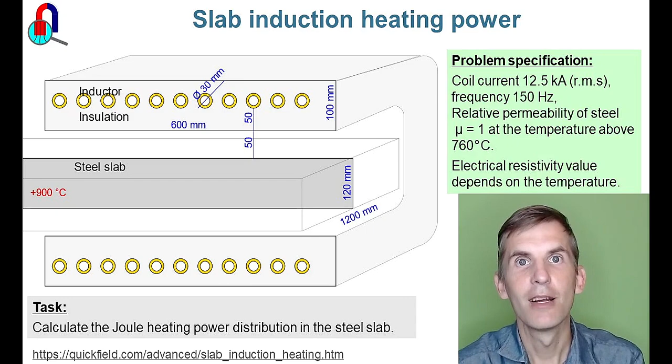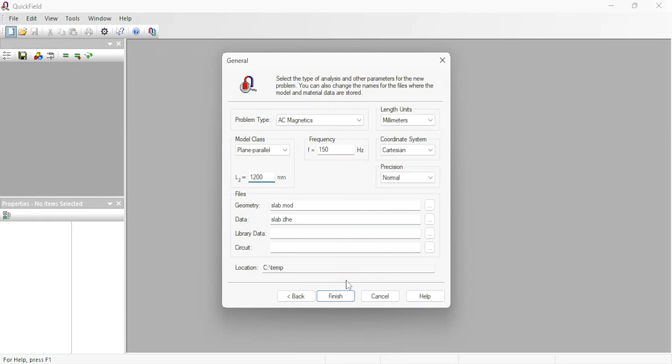In QuickField, I create new problem, slab. Next, problem type is AC magnetics, frequency is 150 Hz, model class is two-dimensional plane parallel, and the slab thickness, the axial length, is 1200 millimeters. Finish.

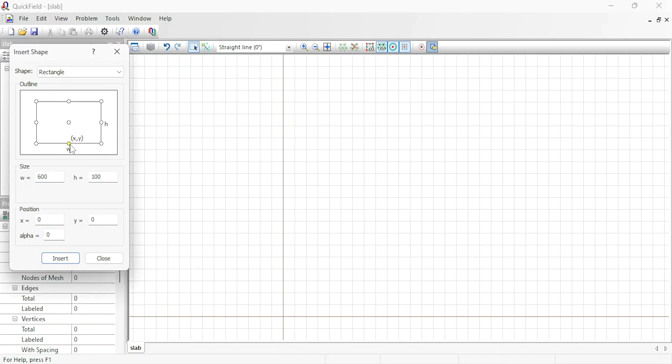On the left you can see the problem pane, and on the right is the geometry model editor window. You can draw the geometry model here, or you can import the geometry model from the AutoCAD file. The model is simple, so I'm going to draw it here from scratch. First, I'm going to insert a rectangle with the dimensions of 600 by 100 millimeters. The insert point will be this one, and it should be located 50 millimeters above the horizontal axis. Insert. This would be the inductor.

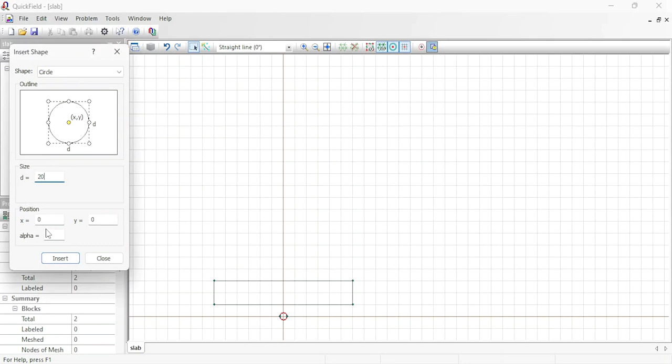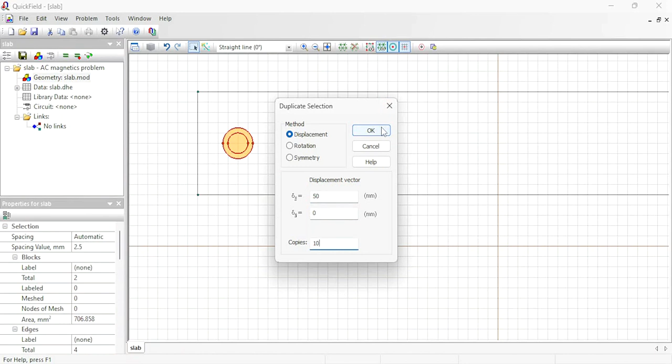Now I need to insert a conductor, a circle with a diameter of 30 millimeters. Insert, and another circle with a diameter of 20 millimeters. Insert. Now let's zoom in and put the circle in proper position here. Then I need 10 copies more. Right click, duplicate selection, displacement by 50 millimeters, and I need 10 copies more. Okay, now let's move it to the right by 10 millimeters.

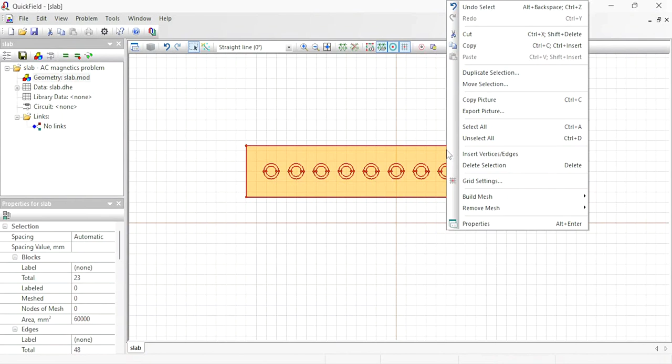This is the upper part of the inductor, and I'm going to duplicate this to get the bottom part. Right click, duplicate selection by the symmetry along the horizontal axis. Okay, this is the bottom part, and I need to insert the slab in the model. So I'm going to insert another rectangle; in fact the slab is much longer than the inductor. I will insert the rectangle with the width of 2000 millimeters and the height of 120 millimeters. So I will have the slab extending to the left and to the right.

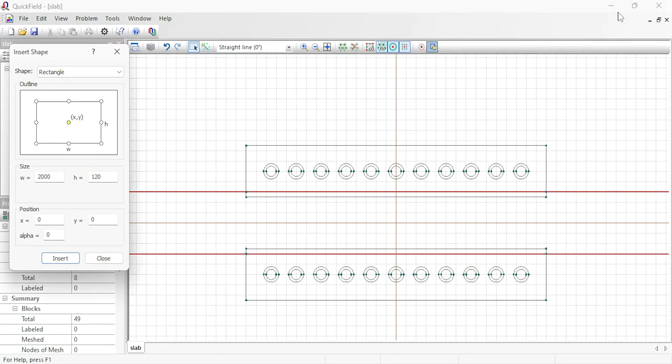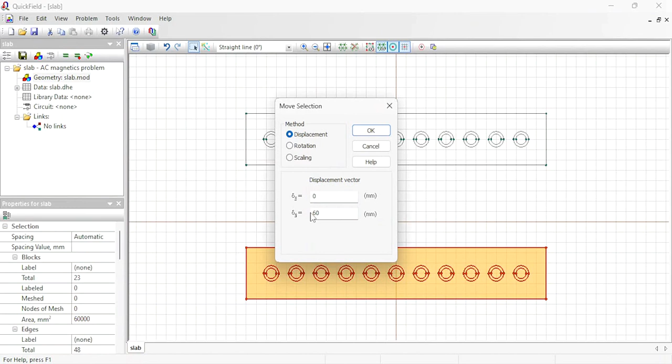Insert. Oh, it looks like I put the inductor in the wrong position. Undo. This point should be 50 millimeters above the slab surface, so I need to select this and move it up by 60 millimeters. And this one I will move down by 60 millimeters. Now insert a rectangle with the dimensions 2000 by 120 millimeters. Insert. This is correct. Now let's assign labels.

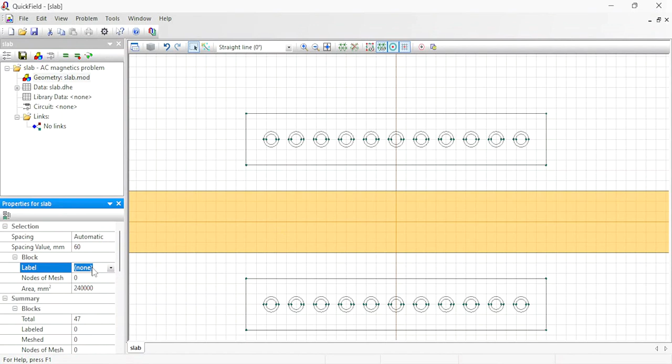Through labels we can explain the geometric object's meaning and provide the physical properties. Switch to Select Objects mode, click the object to select and type in the label name here. This is slab. This one and this one are insulation. To select multiple objects at the same time, hold the Ctrl button pressed. These are conductors with the current flowing to us, the positive direction of the current. So I assign label I+, and for these conductors I assign label I-,

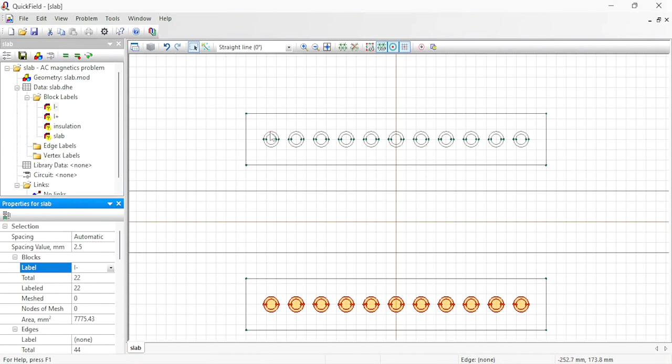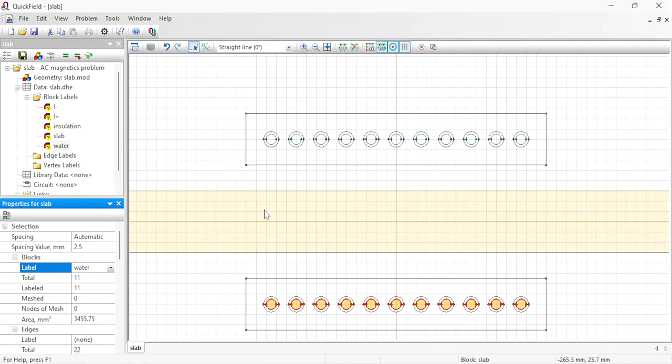and these are hollow conductors. Inside is water. Again, you need to select multiple objects. I'm going to use the rubber band. This is water, and these are water. In fact, the magnetic field is distributed not only in the slab and in the coil, but also in the air outside. So we need to add the air block here.

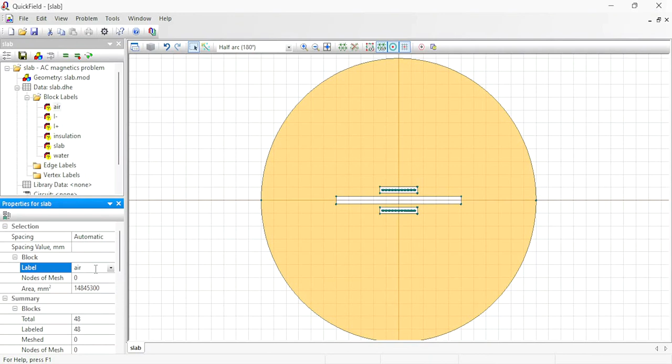Switch to insert mode, change the line type to the half arc, and draw the air block boundary. Switch to select mode, click to select and assign the label air. And I should assign the label to the external boundary. Again, hold the Control button pressed to select multiple objects, external. Now let's provide physical properties for these labels. Double-click the label name in the tree.

Magnetic permeability of the air is 1. For the insulation, I specify permeability of 1. For the water, I specify permeability of 1. Far away from the inductor, the magnetic field fades to 0. So at the external boundary, I specify 0 magnetic potential value.

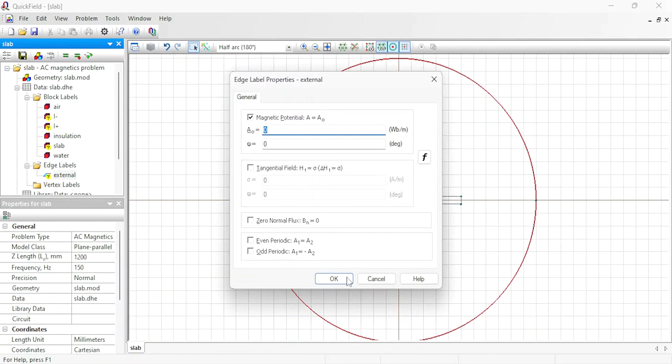For the I+ label, it is a copper conductor, so the magnetic permeability is 1, and the current value is the total current, 12,500 amperes. This is the root mean square value of the sinusoidal wave. I need to specify the magnitude here, so I need to multiply this value by the square root of 2. And the conductors are connected in series.

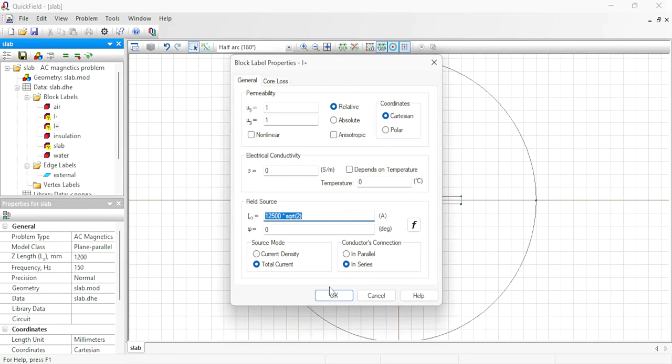Let's copy this. Okay, for the I-, magnetic permeability is 1. Total current, the same magnitude with the negative sign, and conductors are connected in series. And for the slab, above the Curie point, the magnetic permeability of the slab is 1, and electrical conductivity is a function of temperature.

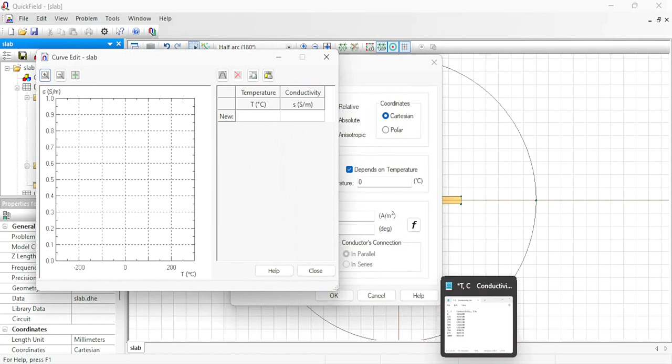I have the dependency here in the text file. Just copy it and paste it here. Okay. And the total current in the slab is 0. Okay. That's all for the geometry model and the material properties.

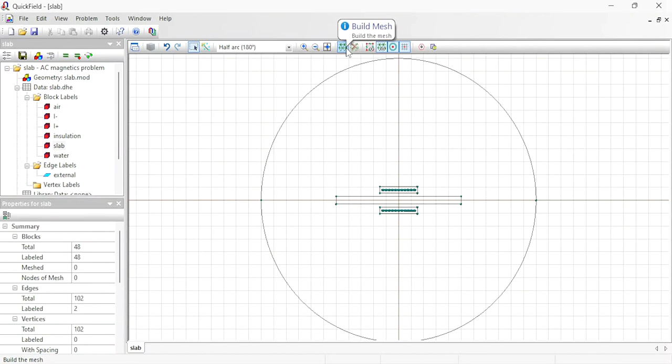Before I can start the analysis, I should build the finite element mesh. Just press this button and the mesh will be generated. Now save all problem files and solve the problem. Let's take a look at the results.

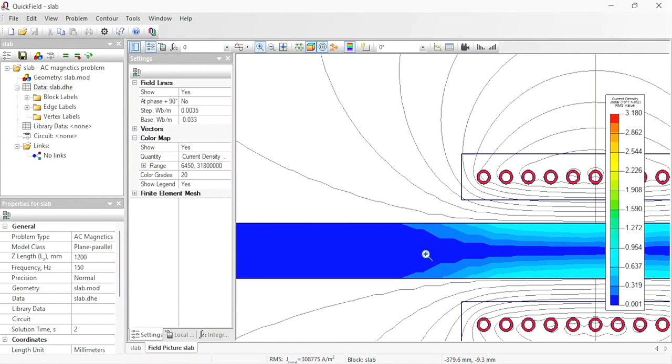Let's zoom in. These field lines and the color map look unnatural. There should be no sharp corners on the field lines. Let's use the Solve and Refine option to get more accurate results. Solve and Refine, okay. Let's take a look at the results. Again, let's zoom in. Much better.

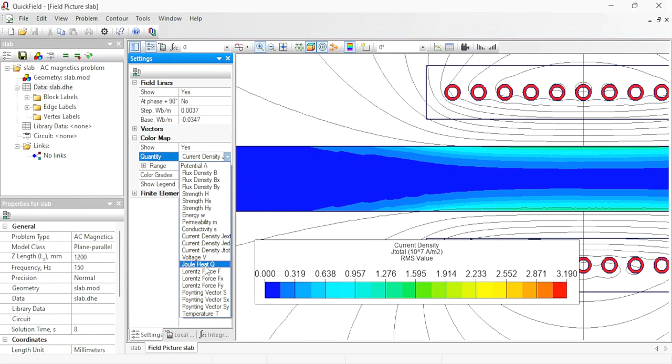Okay, here you can see the current density distribution. You can switch the color map to the Joule heat power and see the power density distribution in the slab. You can use the contour tool, draw the line here, and take a look at the power density distribution along this line on the XY plot.

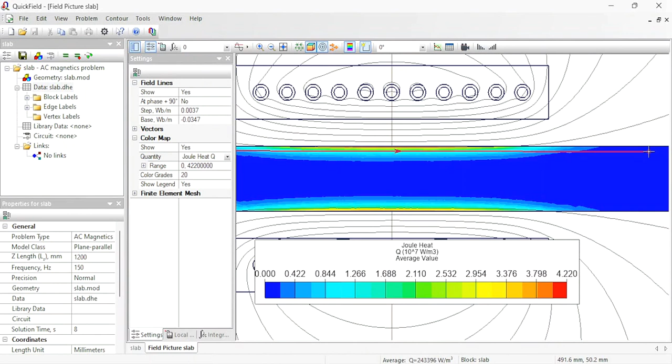You can also draw the contour along the slab and get the power density distribution along the contour. This part is located under the inductor, and these parts are located outside the inductor.

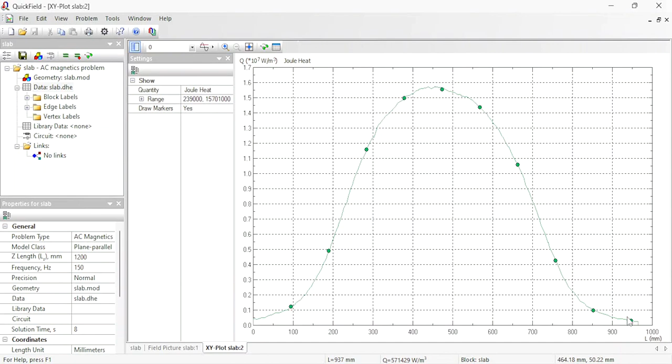You can also use the contour tool to calculate the integral values. I'm going to click inside, so you see the entire slab is selected. Follow to the integrals and calculate the Joule heat power. The total power produced in the slab is 436 kilowatts. And what about the temperature?

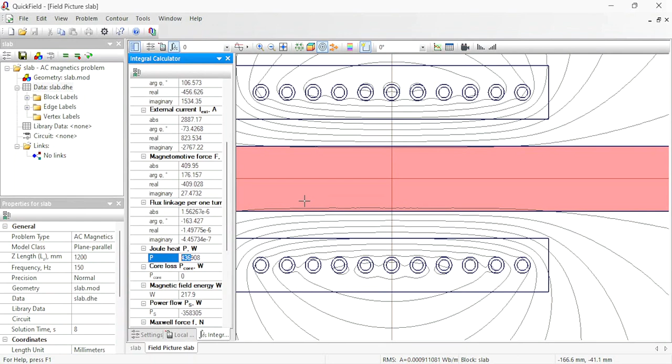To calculate the temperature, you should simulate a transient thermal problem. Okay, I create a new problem. slab_HT, next. Problem type is transient heat transfer, model class is the same plane parallel, axial length is 1200 millimeters. To be able to pass the power density distribution from magnetic to thermal problem, both problems should be based on the same geometry model file.

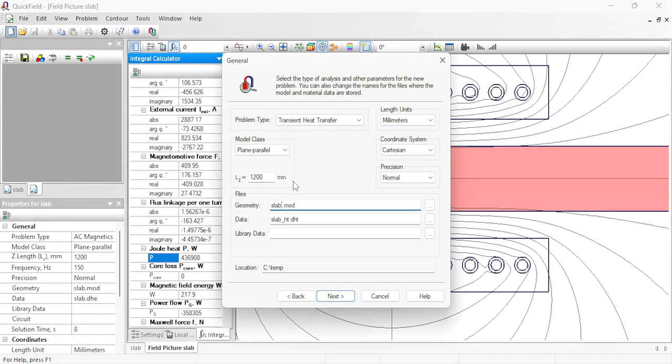So here in the geometry model section, I should type in the file name that was used in the AC magnetic problem. This is the AC magnetics. The geometry file name was slab.mod. Okay, next. Here I should specify the integration time parameters. I'm going to simulate the 10 seconds period with the intermediate time step of 1 second, and the initial slab temperature is 900 degrees Celsius.

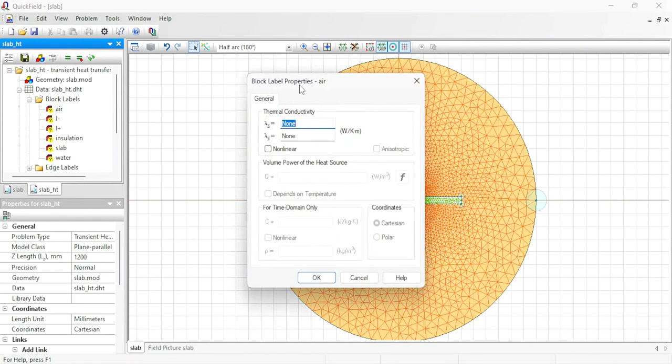Finish. You see the geometry model is the same in AC magnetic and the heat transfer problem, and the labels are the same. Here I should only provide physical properties for the labels. In thermal problem, I specify thermal properties. I'm not interested in the temperature distribution in the air, so I do not specify any properties for the air. Just click OK and you see the exclamation mark next to the label name. This exclamation mark indicates that this label is excluded from the analysis.

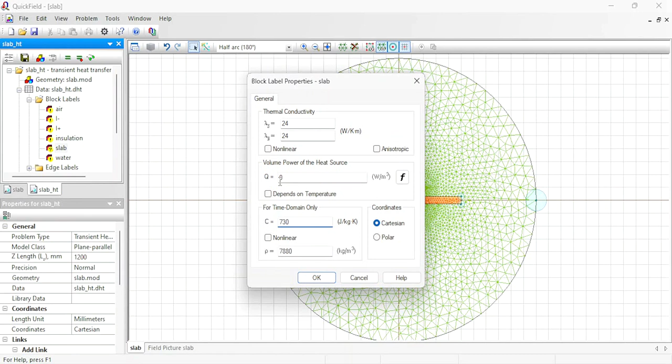I'm not interested in the temperature distribution in the coil as well, and in the insulation, and in the water. The block I'm interested in is the slab. So for the slab, I specify thermal conductivity of steel, which is 24. The density is 7,880 kilograms per meter cubed, and the specific heat is 730. I do not specify power loss here, as I'm going to import loss distribution from the magnetic problem.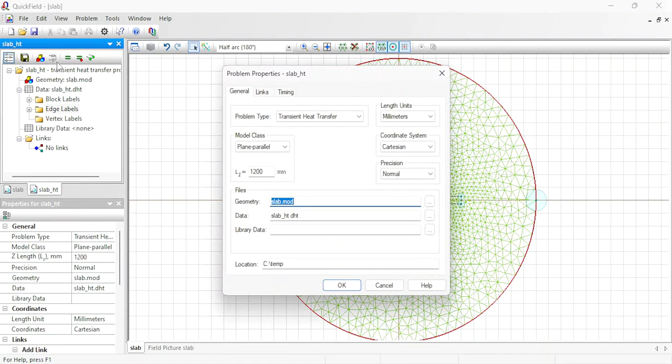Okay. And for the edge labels, I do not specify any properties as well. Next to the edge label, you see the 0 mark. That means that this label doesn't affect the results. It holds no data. Now let's specify the link. Open Problem Properties, follow to the Links tab, choose the data type Generated Heat, browse for the problem. It is located here. Open, add the link. Okay, now I can solve thermal problem.

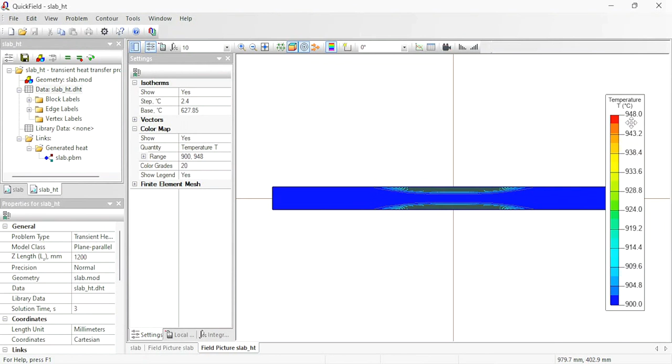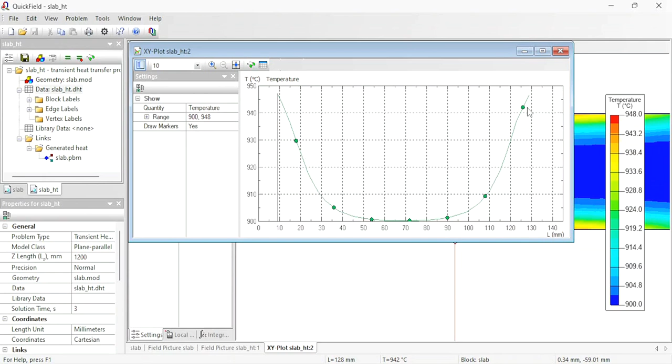And here you can see the results. The temperature rise over 3 seconds period was 48 degrees. Let's zoom in and switch off the isotherms. Here you can see the temperature distribution in the slab. Again, I can use the contour tool and take a look at the temperature distribution along the contour on the XY plot. 900 degrees in the center of the slab, 948 at the surface. In fact, the slab is cooled by the air, and the heated body radiates the energy.

Let's add the boundary condition to the thermal problem. Open the geometry model, zoom in, and switch to select objects mode, and for the slab surface assign the label surface. For this label I specify the radiation boundary condition. The ambient air temperature is 20 degrees Celsius and the emissivity coefficient is 0.8.

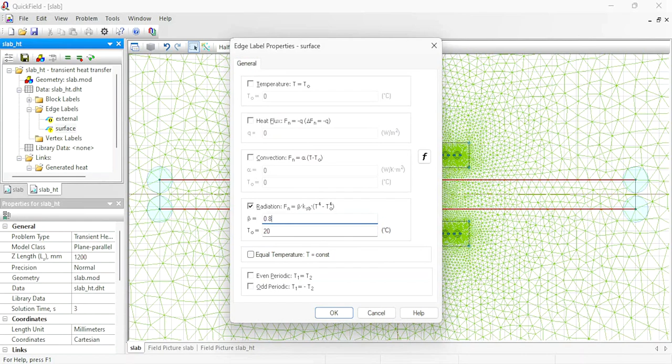Okay, let's solve the problem again, and we've got an error message. The linked problem results are out of date. Linked problem is magnetic problem. Why are the results out of date? Remember, both problems share the same geometry model file, and we have modified the geometry model file. We have assigned a label to the surface of the slab. We have provided physical properties for this label in thermal problem, but we also should provide physical properties for this label in magnetic problem.

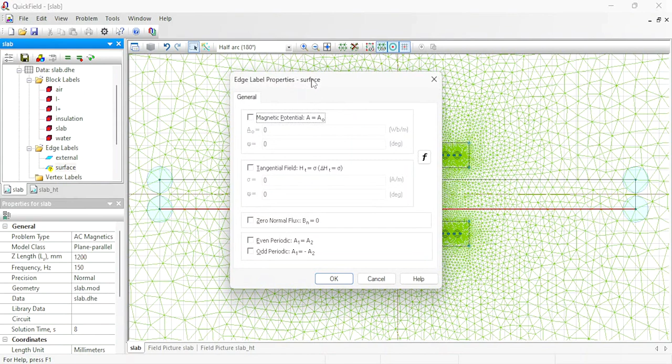Okay, in fact, this label doesn't have any physical meaning in magnetic problems, so I didn't specify any properties here. Just click OK. Again, you see the 0 mark next to the label name. That means that this label doesn't affect the results. Anyway, the data file has been modified and the geometry model file has been modified, so we have to solve the problem again. Solve magnetic problem.

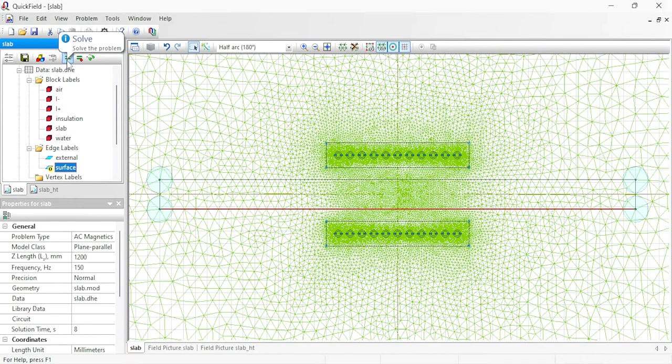Let's take a look at the results. To validate the results, I'm going to calculate the total power in the slab. Again, use the contour tool, click the slab to select integrals. It was 436 kilowatts. 436, exactly the same value. So now I can solve thermal problem.

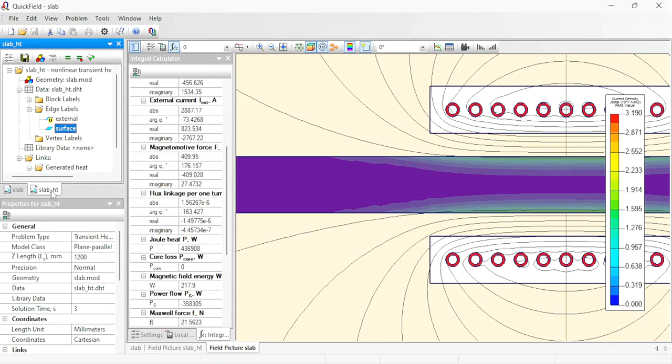Remember, the temperature was 948. What would be the temperature now? Let's take a look at the results. I do not like these broken field lines. Let's solve and refine.

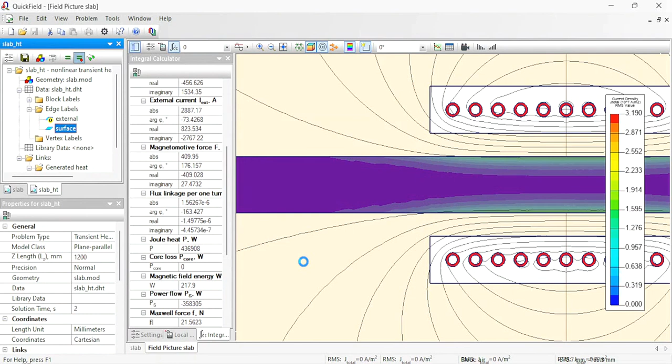Okay, I need to solve AC magnetic problem first. You see, QuickField has built much dense mesh in the slab. Let's take a look at the results and now solve thermal problem. Open the results. Now we have a nice field picture with the smooth isotherms.

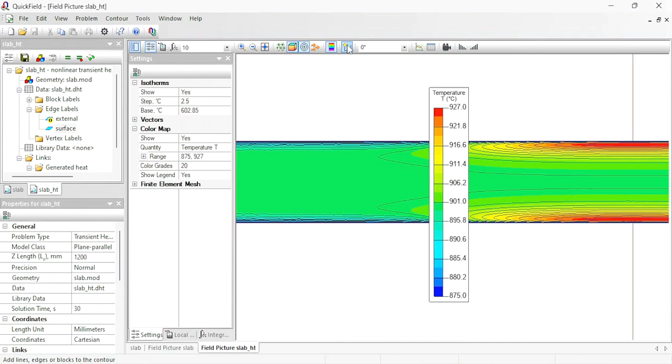And as you can see, the most heated part is located not at the surface but some distance below the surface. That's because the surface is cooled by the air. Let's use the contour tool, draw the line here and take a look at the temperature distribution along this line on the XY plot. Yes, this is the most heated part and it is located about 5 millimeters below the surface.

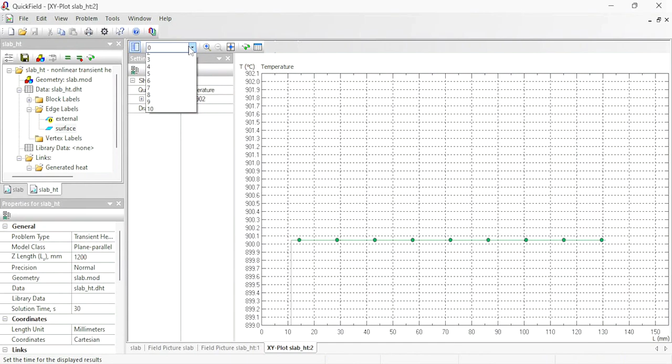In transient problems, you can select the time layer to see the change in the XY plot and in the color map. Initially it was 900 degrees, then the temperature changed. And the same on the XY plot. This part was heated and this part outside the inductor was cooled by the air.

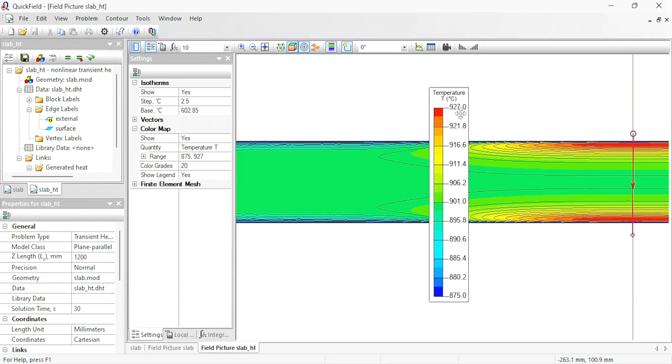The temperature is not very high, so I'm going to keep on heating the slab. But you should remember that the electrical resistivity of metals depends on temperature. In AC magnetic problem, we have specified the temperature of 0 degrees. It's the wrong value. It should be 900 degrees. Okay, let's again solve magnetic problem

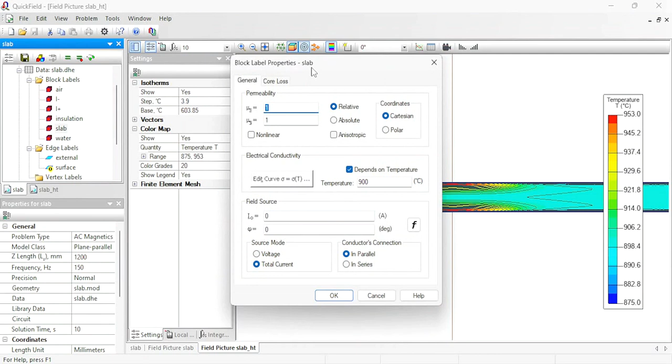and solve thermal problem. Okay, now as I told you, the electrical conductivity value depends on the temperature, and we have specified that the temperature is 900 degrees. But now the temperature is 953 degrees Celsius, so we should correct this value. To be able to do so, I create another AC magnetic problem.

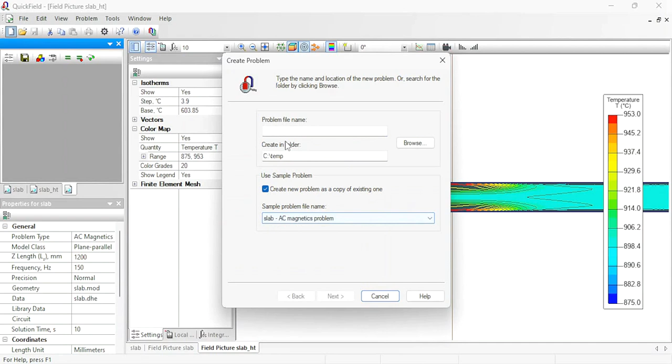I will create the problem as a copy of existing AC magnetic problem and call it slab_1. Next, AC magnetics, model class plane parallel, frequency 150 Hz. I'm going to pass the temperature distribution from thermal problem to AC magnetic problem. And to be able to pass data from one problem to another, the problems should be based on the same geometry model file.

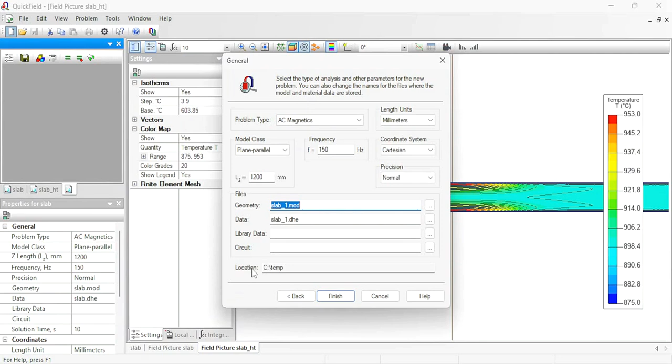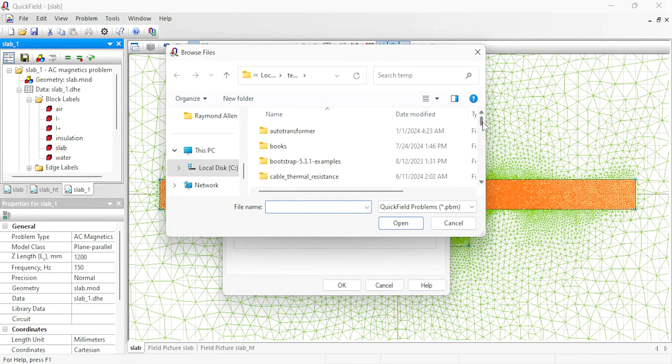Finish. The geometry model is the same and the material properties are the same, but now instead of specifying the temperature here, I'm going to import the temperature distribution from thermal problem. So open the problem properties, links, temperature field, browse. That's the thermal problem. Open,

add. Remember, in the thermal problem there are several time layers. I need the time layer of 10 seconds. Update. Okay. Solve the problem. Let's take a look at the results.

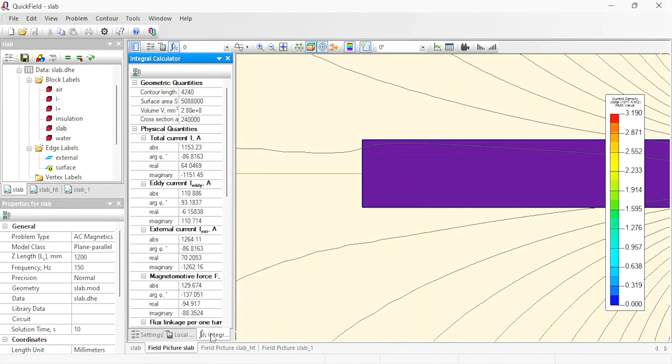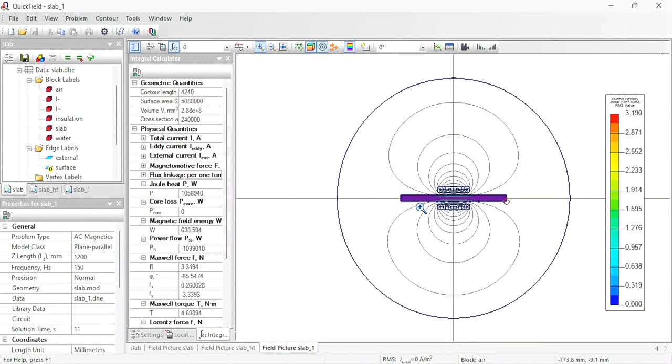Now let me check. When the temperature was 900 degrees, the total power generated in the slab was 1.05 megawatts. Now, with the temperature of 953 degrees, the power generated in the slab is almost the same value, but still there is some difference. And remember, the power distribution is not uniform.

Okay, now I have the new power distribution in the slab. Let's keep on heating the slab. I create new problem as a copy of transient heat transfer problem, slab_ht_1, next. Again, the problems should be based on the same geometry model file.

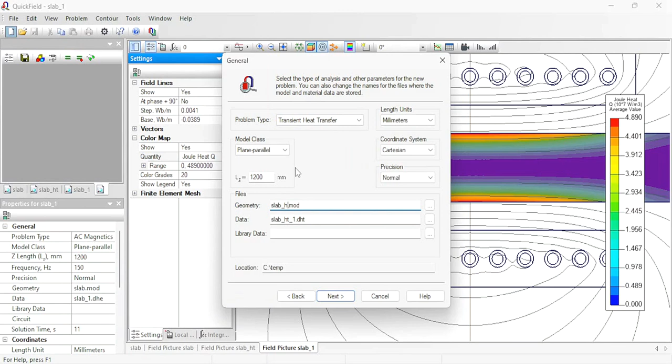Next. Again, I'm going to simulate the 10 seconds period of time, but now the initial temperature will not be 900 degrees. I'm going to import the initial temperature distribution from the previous heat transfer problem. So follow to the links tab,

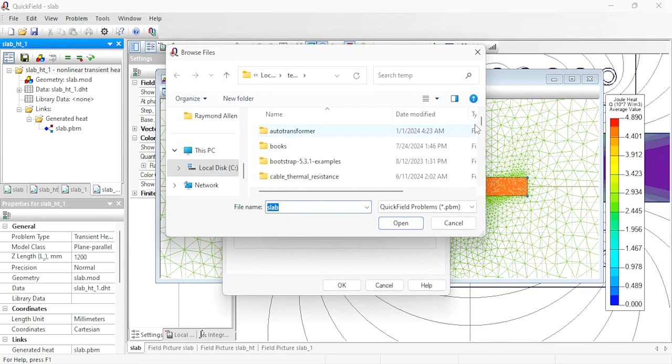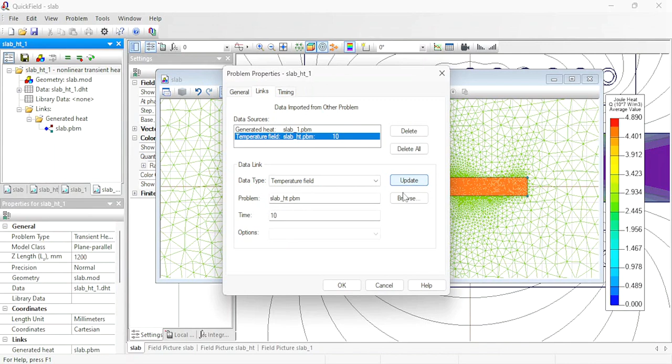delete this one. I need the generated heat from the slab_1 problem, and I need the temperature distribution from the heat transfer problem. And I need the temperature distribution at the moment of time 10 seconds. Update. Okay. Let's solve this problem. Let's take a look at the results.

This is the temperature distribution after next 10 seconds of heating. Let's adjust the field picture and select the time layer of 0. You see, it is not 900 degrees uniform temperature distribution. It is the temperature distribution that was calculated after first 10 seconds period of heating. Now we have another 10 seconds period of heating.

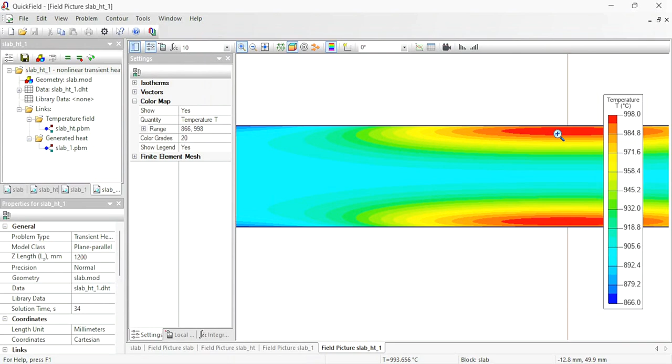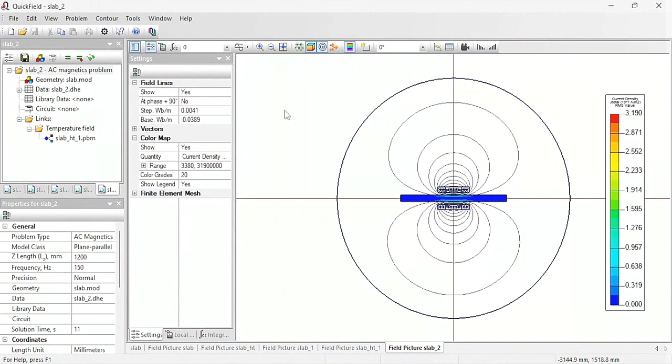And if you plan to keep on heating the slab, you need to create another magnetic problem to take into account the actual temperature distribution and actual value of the conductivity. And this magnetic problem should import the temperature distribution from the slab_ht_1 problem. Solve the problem, get the new value of the power, and pass the power distribution in the next heat transfer problem.

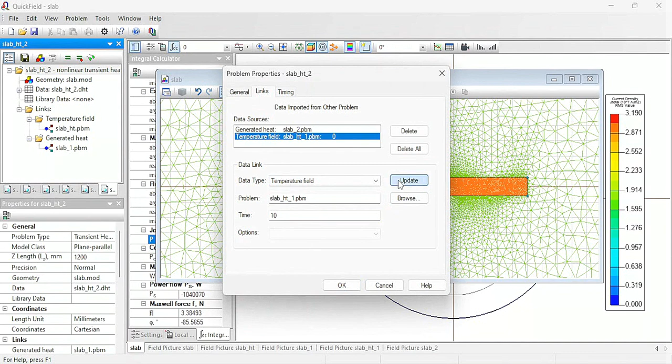This way you can continue building the chain of AC and transient heat transfer problems, and QuickField will automatically adjust material properties with the temperature variation.